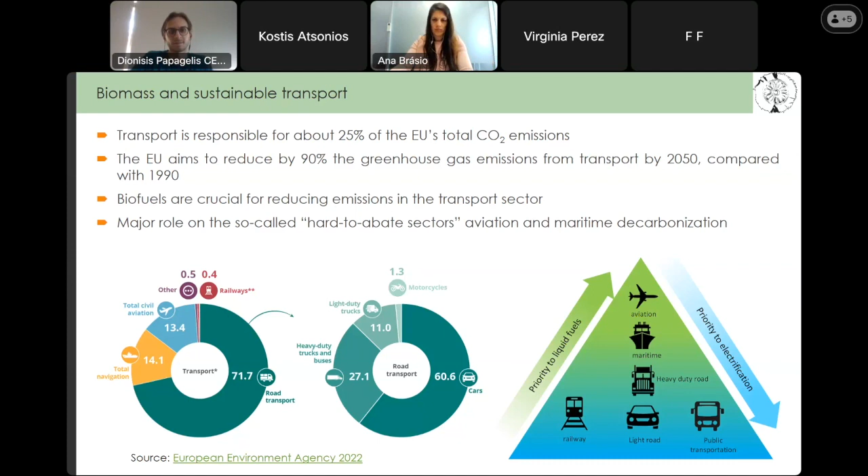Given that, EU aims to reduce these greenhouse gas emissions from transport by 90% by 2050 compared to 1990 levels. To achieve that, biofuels will play a crucial role. As you can see in the right-hand side scheme, subsectors like maritime and aviation are called hard to abate sectors, because for technical reasons other decarbonization solutions like electrification or hydrogen cannot be applied at large scale. So for those subsectors, biofuels are expected to play a very important role.

This slide presents an overview of different pathways for the production of different kinds of advanced biofuels that can potentially be used in the transport sector, starting from feedstock like vegetable oils, animal fats, oil from algae, organic waste and bio waste, and last but not least lignocellulosic biomass. There are several options to convert them into an intermediate like lipids through recovery, sugars or biogas through hydrolysis and digestion, or syngas through gasification. These intermediate products, after upgrading, result in different kinds of fuels like HEFA, biodiesel, CNG, biomethanol, etc., that can be used in aviation, maritime, road and heavy road applications.

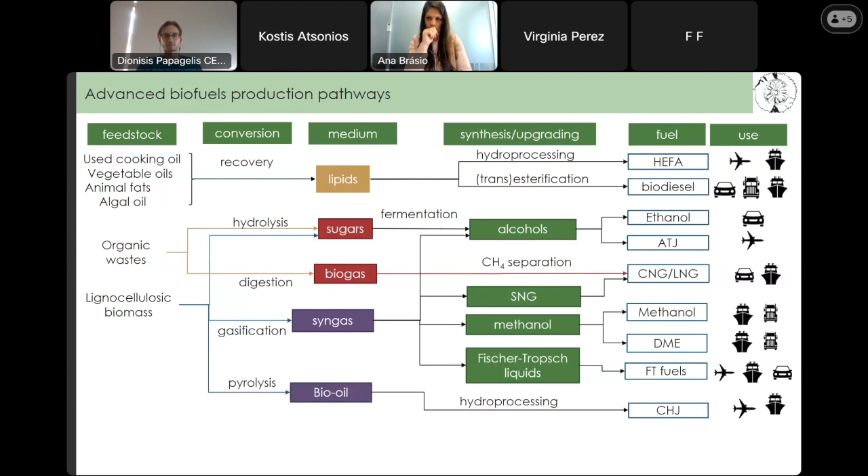Apart from these pathways that deal with the valorization of sustainable biomass like biogenic residues and waste, there is also another option to produce renewable synthetic fuels using carbon dioxide from low carbon applications like bio-based industries or other biogenic derived carbon dioxide. In that case, carbon dioxide can be converted into either syngas or lipids, and almost the same list of fuels can be produced through catalytic, biological, and other processes.

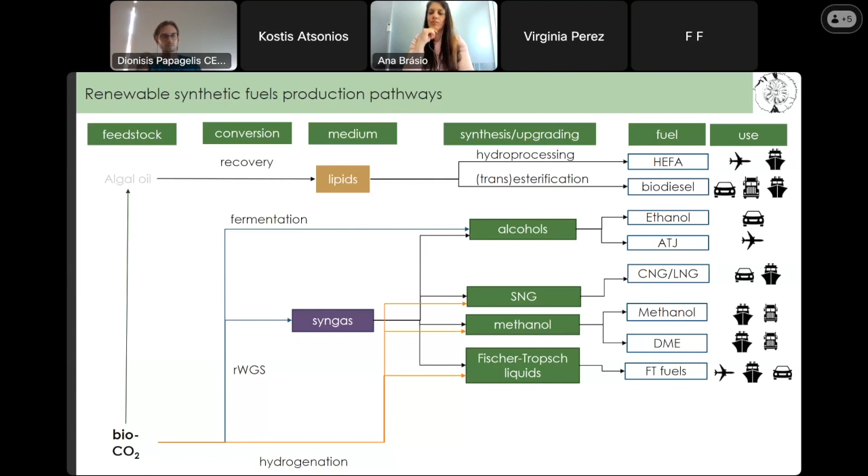Now, in this presentation, I'm going to present the progress made in four interesting European funded projects that deal with the development of new pathways and processes for the production of advanced biofuels and renewable synthetic fuels. In this slide, I summarize the pathways I'm going to talk about later.

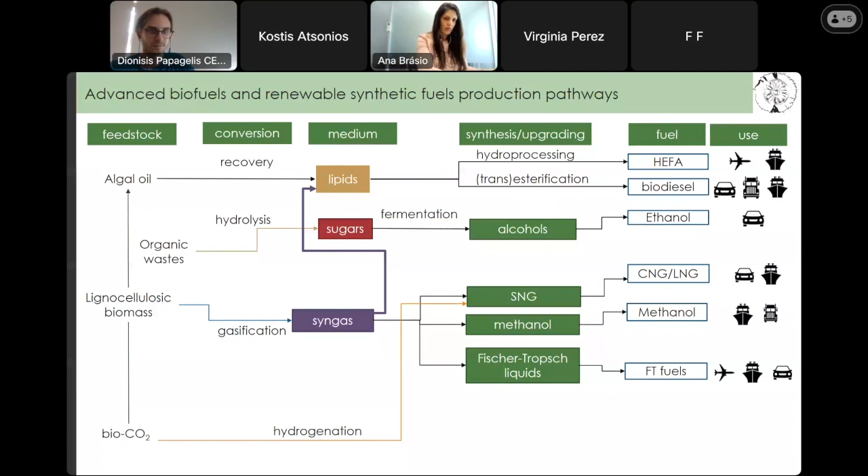Starting with the first project, which is BioSFerA. BioSFerA deals with the production of drop-in biofuels for aviation and marine applications through a novel combined thermochemical and biochemical pathway. The main goal is to develop this new concept, based on a two-step biological process that converts syngas from biomass gasification to microbial oils, and these oils undergo hydrotreatment, and the final product is hydrotreated triglycerides,

which can be regarded as a drop-in biofuel. The key benefits of this process are fuel flexibility, because the biomass technology we employed has proven ability to valorize different biomass feedstocks from different origins, the minimization of gas cleaning steps because the microbes can sustain certain impurities in the syngas, the low OPEX, and enhanced yields of the target biofuels.

Our role in this project is, first of all, we were the project coordinator. I say were because this project ended last March. We undertook the characterization and analysis of the feedstock and the selection of the most promising of them, process simulations through Aspen Plus software, numerical simulation through CFD analysis, and lipids hydrotreatment at both lab and pilot scale, and also the key horizontal activities like techno-economic and environmental evaluation through TEA and LCA analysis.

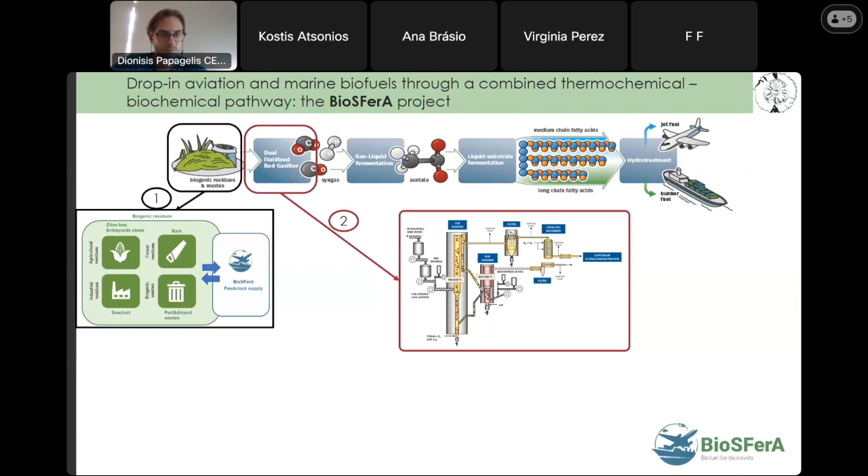This type of gasifier does not need pure oxygen to operate, so in that case we get rid of the necessity to build a cost intensive and energy demanding air separation unit, and produce raw syngas after very specific and certain gas cleaning steps like tar removal.

This is the feedstock for the production of the new type of oil, which is microbial oil, through a novel two-step biological process, where in the first step, syngas is converted into acetate through an anaerobic fermentation using acetogenic bacteria, and the produced acetate is the substrate for the production of microbial oil using engineered strains of oleaginous yeast within an aerobic fermentation unit.

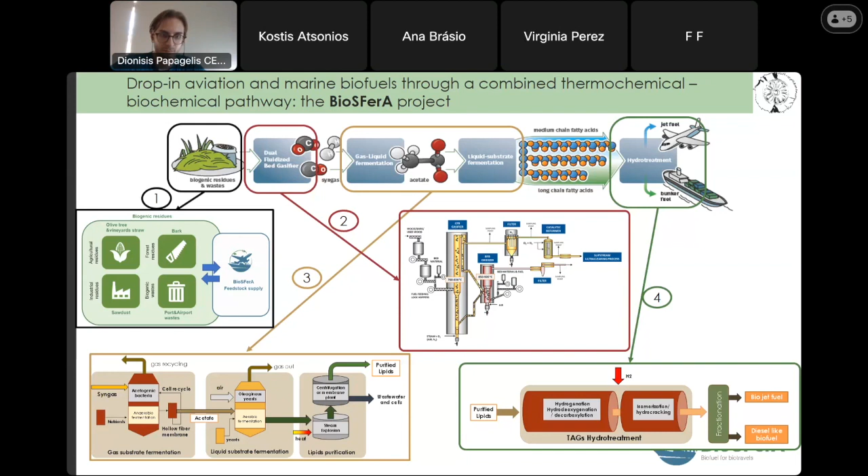This oil exists initially within the cells of the yeast and undergoes purification and extraction through a series of different lipid purification steps. And the microbial oil that is purified is sent to a hydrotreatment reactor where, through catalytic conditions under high pressure and temperature, it is converted into paraffinic compounds and alkanes that after fractionation are the basis for the production of the final product, which are the biojet fuel and diesel-like biofuel, bunker fuel.

I don't know why. I can hear you. Can you hear me? Yes, there was a minor hiccup. If you could just repeat the last 10 seconds of just this page. Ah, okay. Okay.

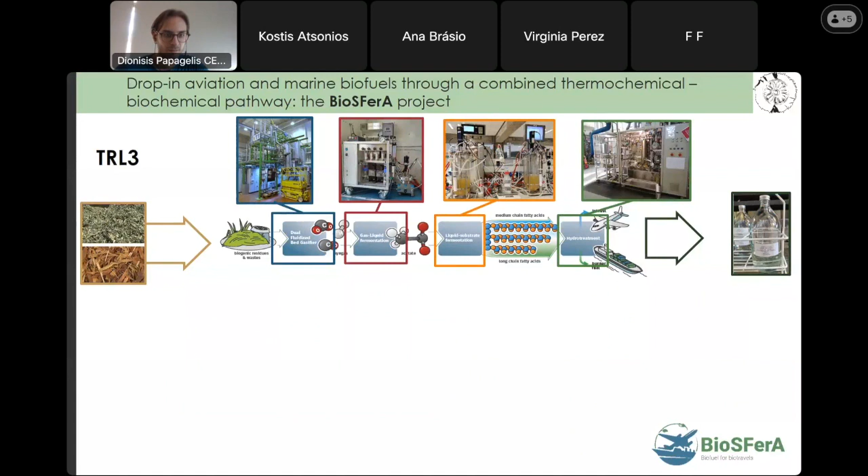In a nutshell, I would like to show that during these 4 years, we aimed to perform the necessary lab scale activities in the whole value chain for the optimization of the process parameters in each step. And based on that, we performed the pilot activities at TRL5 in the overall value chain as well.

And some key facts from this project that ended last month is that we successfully performed gasification, gas cleaning and gas fermentation pilot campaigns, and we managed to produce acetate with a production rate of 0.77 grams per liter per hour. We proved that fewer syngas cleaning steps than thermocatalytic pathways like Fischer-Tropsch synthesis are required.

For the lipids production, we performed liquid fermentation tests with three different substrates like acetate, glucose, and glycerol, achieving quite a good rate of 0.26 grams per liter per hour. Very important is that no intermediate purification step is needed between the acetate production and the liquid fermentation process.

From the energy analysis and the techno-economics, we estimate that the overall plant energy efficiency was at 35.6% of energy, with almost 27% of total carbon utilization, where the minimum jet fuel selling price was estimated at 1.83 euros per liter.

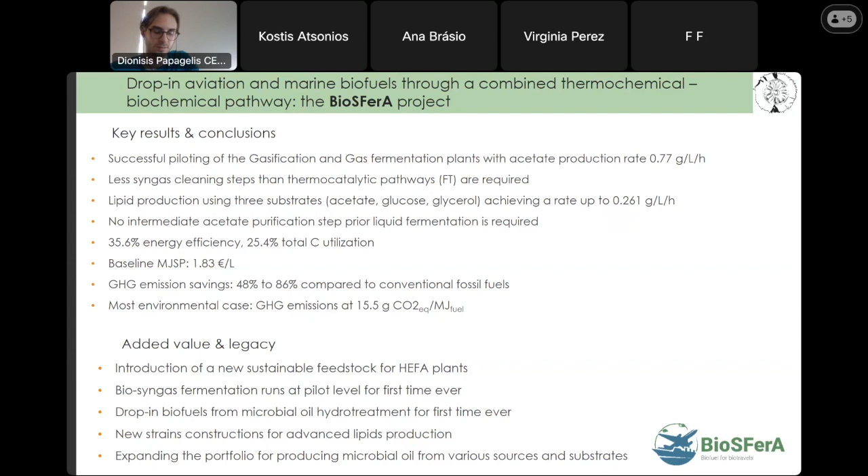The second project is called Clara, and this project's main scope was to develop a new chemical looping gasification technology, where the produced gas was the basis for the production of Fischer-Tropsch liquids, employing and valorizing biogenic residues at a large pilot unit of 1 megawatt thermal.

According to that concept, the biogenic residues with similar origins like the previous project undergo pre-treatment and gasification through this quite novel chemical looping gasification technology. The produced syngas goes into a Fischer-Tropsch reaction for road transport fuels production. And before that, a novel syngas treatment technology through acid gas removal was developed as well.

Our role in that project was to perform the simulations at steady and dynamic conditions, and also to perform the wax hydrocracking tests.

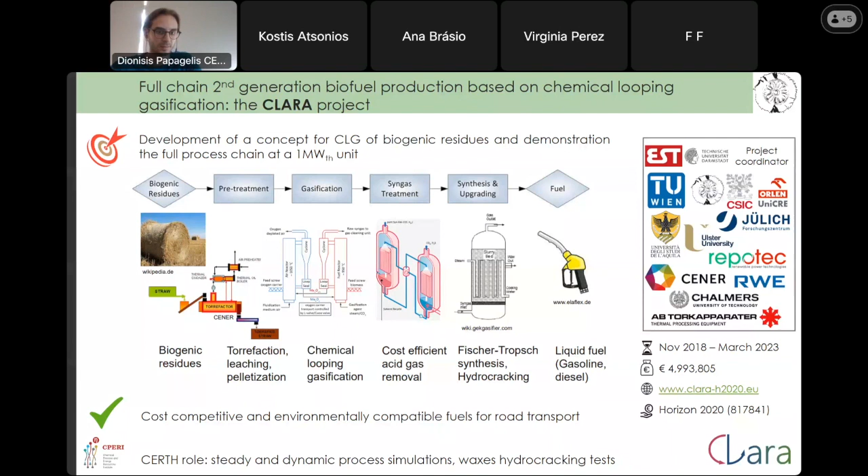...was the Fischer-Tropsch synthesis process. This project ends in March of 2023, and the coordinator was the Technical University of Darmstadt from Germany. This is the process flow diagram of this concept, starting from the biomass pre-treatment using a portfolio of different methods like drying, leaching, and pelletization.

The treated biomass enters the dual fluidized bed of the chemical looping gasification. And in that technology, the aspect that makes it different from other technologies is the fact that the oxygen needed for the oxidizing medium of the gasification reactions is not coming from air, but from circulating solid oxides that are oxygen carriers. At first they react with air in a different reactor and get the oxygen from the air, and then they are sent to the fuel reactor, where the oxygen reacts with the vapors coming from the fuel devolatilization.

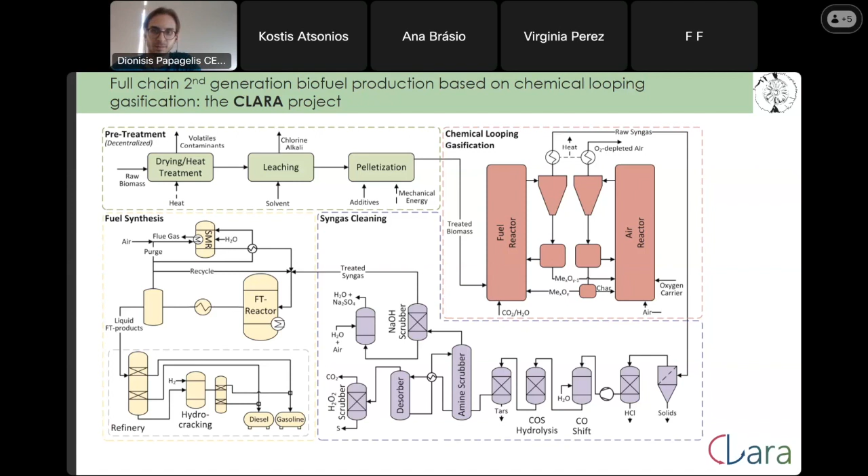The raw syngas undergoes different gas cleaning steps for the removal of all the impurities that may harm the catalyst performance of the Fischer-Tropsch synthesis. And there the FT crude is produced under catalytic conditions at high pressure and temperature. And the final step is the heavy fraction of waxes undergoes hydrocracking for the production of more valuable products like diesel and gasoline fractions. That also enhances the overall yield of the desired products. This is the schema of the respective activities that were carried out in this project.

Sorry, just to let you know, we're a bit past the 15-minute mark. So, would you like me to finish my presentation or to skip to make it faster? No, you just prioritize what is more important, or of course, if you're towards the end, please go ahead and finish normally. Okay, okay.

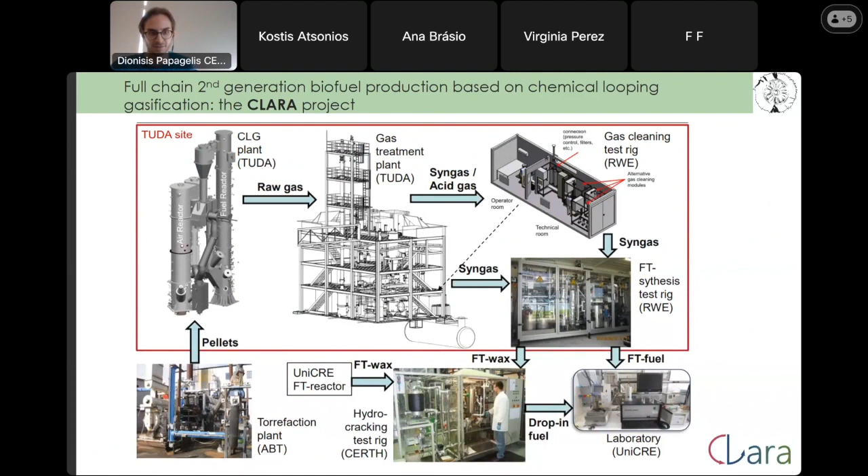The third project is FlexSNG, and the project coordinator is VTT from Finland. The idea is to develop a flexible and cost-effective gasification-based process for the production of biomethane with pipeline quality that can be used for various purposes, and high-value biochar and renewable heat, using a wide variety of biomass residues and biogenic wastes. The key benefit of this concept is that the gasification is able to switch between different operation modes, either maximizing the biomethane production or producing both syngas for biomethane production and biochar.

Our role here is to perform the design and model development of the overall concept, the CFD simulation analysis, and the analysis from an economic and environmental point of view. I will not get into more details about the concept. Maybe if someone asks later, I will give more detail.

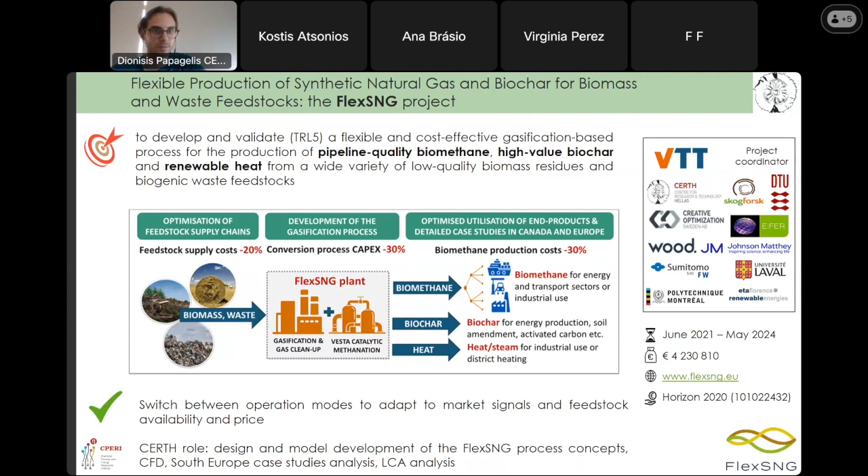The only aspect I would like to mention is that through this concept, the aim is to minimize the cost at different steps that exist in the state-of-the-art bio-SNG value chain, like the elimination of water gas shift, the minimization of oxygen demand, and the introduction of an innovative oxygen transport membrane technology, aiming to achieve a cost saving of around 30%. And also very important is the methanation technology that we employ, which simplifies the overall process and minimizes the final biomethane purification steps.

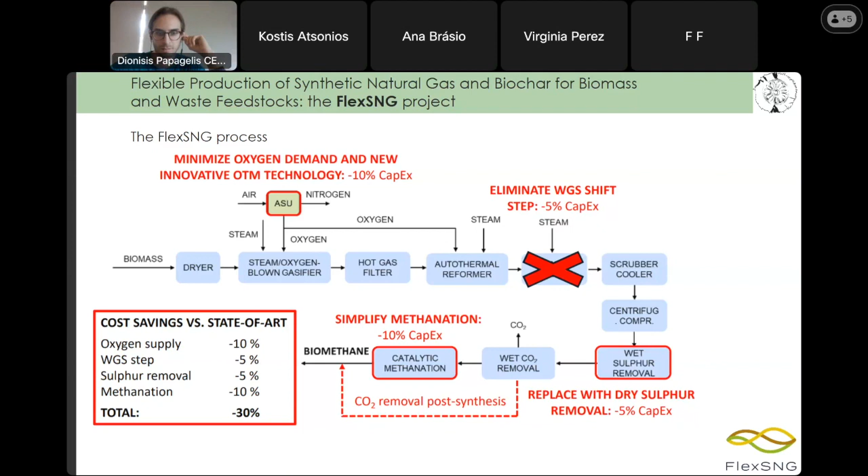And the last project is the Fuelphoria project, which is a new Horizon Europe project that aims to demonstrate a portfolio of different technological solutions for the production of both advanced biofuels and renewable fuels of non-biological origin, using sustainable feedstock and renewable energy. That sustainable feedstock includes residues and waste, CO2, and the portfolio of state-of-the-art technologies that we are developing is from different domains like biochemical, thermochemical, photobiological, electrochemical, etc.

The products will be used for the transport and power sectors, and also a methodological analysis is being developed in order to maximize the exploitation of the overall concepts and to foster these advanced biofuel technologies at the European level. Our role here is we are the project coordinator. This project consists of 26 partners. We also have the general overview of the demo supervision and the pilot operation, and are also in charge of performing the technical evaluation of the demo results.

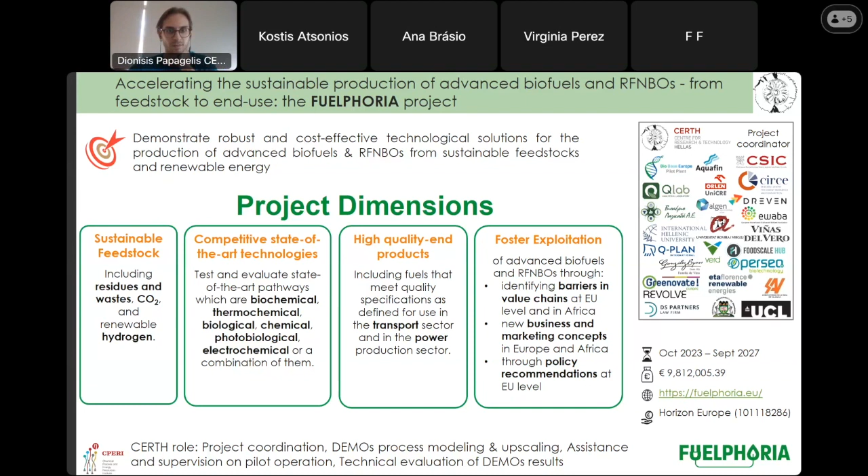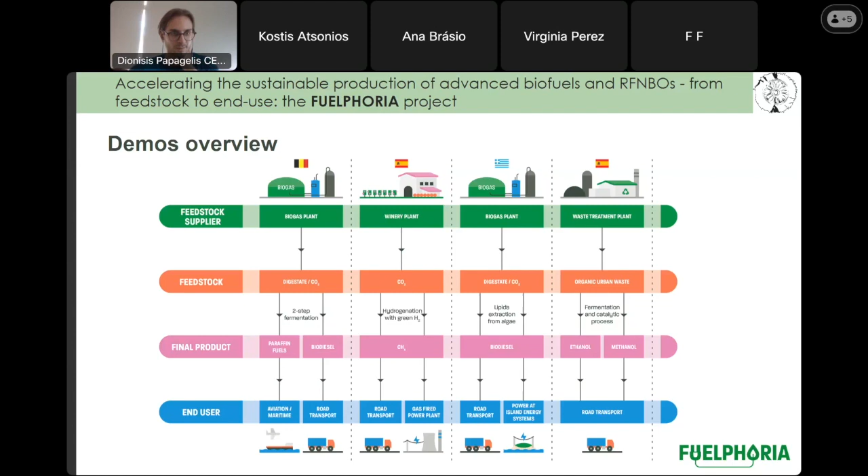There are several advanced technologies that offer the possibility to utilize different carbon sources for the production of advanced renewable fuels, also with the use of green and renewable hydrogen. There are high expectations for biofuels, and we expect them to have a leading role in transport, especially in aviation. And also our organization, CERTH, has a very active role through our involvement in several EU-level research efforts to foster and develop these technologies for the production of advanced biofuels.